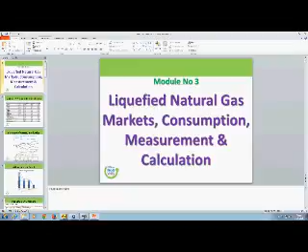All right, folks, let's start this part about the LNG calculation. Very briefly, this is a short one. Can you all see it? We have touched on this thing on our first day.

So it is the market consumption measurement and calculation. This is what we are going to do. You remember I've shown you on the first day where we have got methane. Every different LNG is like every finger of us has got a different fingerprint. Whatever we produce at one time in one refinery or one liquefaction plant, it will be different to the other.

So normally, as a general rule, Ras Laffan has got 90% methane, 6% ethane, propane, butane, and this is Das Island, and this is the standard. So normally the density of it is about 0.46, and the carriage temperature could be different because we call them impurities. We prefer to have pure methane molecules in it, mole fraction, but unfortunately the cost of removing these things is very, very high.

So sometimes these impurities are there. We are going to consume it, so we do not want it to be, but this is what is affecting your engine combustion. For example, if you have got a high number of moles of propane and ethane, your piston is going up. Their ignition point is different, so they will ignite and they will not let the piston go up properly and get the real combustion at the right timing. That will create knocking in your engine.

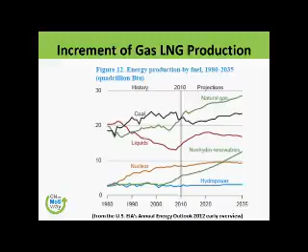Increment of gas LNG production, just to give you a touch - coal is fairly steady. Natural gas, can you see how many millions of tons have increased from 1980 to 2035? At the moment we are somewhere here with regard to hydrocarbon, but it is going to be natural gas here, and sometime later we are going to go very high. There is a saying that nuclear might be a very good alternative, but in the current political or security situation, that can't happen.

So this is the LNG environment benefit versus traditional engines. We have got these figures for emissions across the engines - low sulfur fuel gives this kind, and heavy fuel oil this kind. So we want to reduce the NOx, we want to reduce the carbons, and we want to reduce the SOx and particulate matter. The good thing is in LNG fuel these things are very less. Can you see? Most of it is just NOx and a little bit of carbon dioxide - no particulate matter, no SOx.

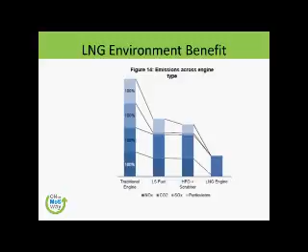So there are three main markets again. Henry Hub, a distribution for natural gas pipelines in Louisiana, owned by Sabine Pipe Line LLC. Why are we giving you this information? So that it is food for thought. When you go back, go to the websites of these. You can note down their names and go to their websites and see what's going on.

Because understanding LNG - we are talking about LNG calculation - and why we are doing this calculation is for buying and selling, isn't it? Bunkering is all about buying and selling. Touch wood, there is very little monkey business in LNG bunkering as compared to others. The pricing point of a natural gas futures contract traded in New York Mercantile Exchange, we normally refer to as NYMEX - if you Google NYMEX you will find this. And the OTC swaps traded on Intercontinental Exchange, called ICE. So normally we refer to it as ICE, NYMEX, and of course Henry Hub as HH. Henry Hub is a USA one.

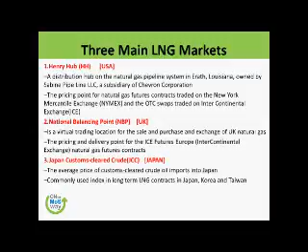We are selling and buying it not in liters or tons. We buy and sell it because of its calorific value. We call it MMBTU, British Thermal Units, and LNG is traded on its energy content. The more impurities, the lesser the MMBTU, millions of British Thermal Units.

1 cubic meter of natural gas is equal to roughly 0.0392 MMBTU. Again, it varies with the quality of LNG. 1 cubic meter of LNG is 23.9 MMBTU roughly.

So you can see, 1 cubic meter of natural gas, NG, which is coming into our pipelines at home - but when you convert it to LNG, it is rather than 0.0392, it is 23.9. Because what we have done, we have condensed it to 600 times of its volume. So technically, 1 cubic meter of LNG is equivalent to roughly 600 cubic meters of natural gas.

1 MMBTU could heat, just for your knowledge, 2519 liters of water from 0 to 100 degrees centigrade. And 1 cubic meter of LNG, which is 23.9 million BTU, could heat 23.9 times 2519, which is 60,204 liters of water from 0 to 100 degrees. So over 60 tons of water you can heat with 1 cubic meter of LNG.

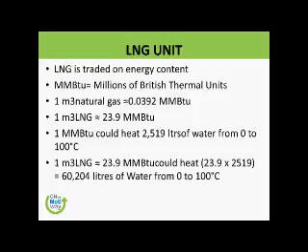And of course, it is all specific heat, we are not talking about any latent heat. Are we happy? This is just to give you the understanding of the unit. Unless you understand the unit, you cannot calculate it, buy it, sell it, or use it in your engine room, or on board your vessel, or supply it as a bunker to another vessel.

So a BTU, I'm just explaining - those of you who are naval architect engineers, you already know what BTU is. The amount of heat needed to raise 1 pound of water by just 1 degree Fahrenheit, which is equal roughly to 1055 joules, or 252 calories. I suggest you please note it down, because this conversion is important, can you note it down please?

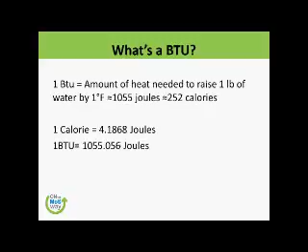This is courtesy of the Energy Information Administration. That is the source for this information.

We are now talking about the fuel efficiency in kilowatt hours per pound. Wood has this, coal has this kilowatt per hour for heating efficiency. Propane has this much, oil has this much. So natural gas is slightly higher than oil, both in heating efficiency and kilowatt per hour per pound. So that's why we are very happy that this thing is cheap enough.

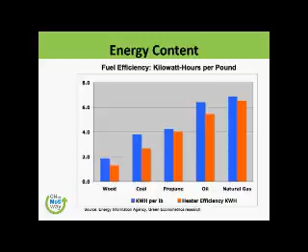It is available in abundance. There is a rough estimation - of course, don't quote me - it is going to be available for a couple of hundred years. But of course, the world, or the experts, are trying to find other alternatives now. Okay, so LNG content, can you note down this also? This is giving a comparative analysis.

As an engineer or naval architect, you also want to compare these fuels. For example, LNG has 53.6 megajoules per kilogram, MDO has 45.5, and HFO has 42.9. So LNG has more energy here, remembering we have reduced it to 600 times its volume.

600 cubic meters, equal to the size of this building, can be shrunk down to just 1 cubic meter which we can carry in our suitcases, isn't it? That is the amount. Now we are doing the comparative analysis of fuel oil flash points.

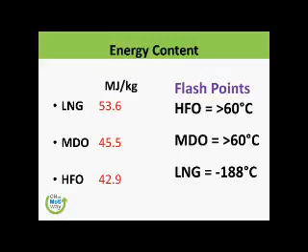So this is the volumetric comparison. HFO is 1.8 times the volume of LNG, and MDO is 1.7 times the volume of LNG. So this is the volumetric comparison for our bunker bars, bunker tanks on board the ship.

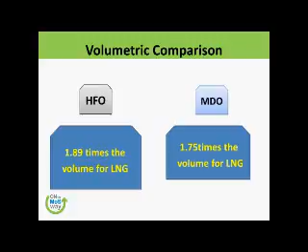Various LNGs have different identities, which I have already discussed with you. And of course, methane number - that is one important thing for you as an engineer. It provides an indication of knock tendency. Pure methane is going to be 100 methane number. So if you are taking a bunker, or giving a bunker to someone, they will be more interested in the methane number - how many moles of methane are there, or how much is the impurity, isn't it?

So pure ethane has 44 moles and 44 methane number, and pure propane similarly. If we contaminate this one, this number will not be there. So the number varies depending on the composition of LNG. The methane number is the final number, putting it all together. There may be some butane molecules as well.

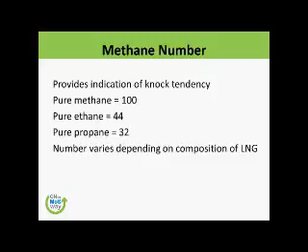So knocking - this is what you as an engineer will be more interested in. That is why I want you to please feel free to ask me questions. It affects low pressure 4-stroke engines normally, causing not smooth combustion in the cylinder chamber. Spontaneous combustion ahead of the flame front - I've already explained normal combustion, with the spark. But slightly ahead of the build up of maximum pressure, there will be a knock - this is a very slight knock, and this is an intense knock. If the knocking is more, the vibration and stresses on the engines, and the exhaust temperature management will be difficult, and all these kinds of things.

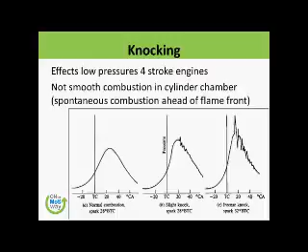So, methane number: if a gas mixture has a methane number of 80, its knock resistance is equivalent to that of a gas comprised of 80% methane and 20% hydrogen. It is as simple as that. There are gas constituents which have a higher methane number than 100. Therefore it is also possible for a gas composite to have a higher methane number than 100. Mind that it is not percentage - it is the moles or the molecules or number.

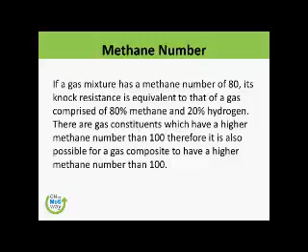Now, LNG behavior - this is very important, especially for purging the tanks or managing bunkers, etc. LNG, can you see, at minus 100 degrees: if the room temperature here is minus 100 degrees, I will find the LNG suspended in the middle, anywhere. If I release the LNG here, it will stay here. It will be suspended because it is the same density as the air, neither heavier nor lighter. And if it is going to be, say, minus 90, it is going to go up - so it is lighter than air. You remember what is NAIL?

Nitrogen, air, inert, and LPGs - that is NAIL. And methane is sometimes on top or at the bottom. If it is in this state, it is on top. If it is in this state, it is at the bottom. So above minus 100 degrees, it is lighter than air; below minus 100 degrees, it is heavier. So the ratio is the density of methane vapor divided by the density of air. Note it down - density of air is assumed to be 1.27 kilograms per cubic meter.

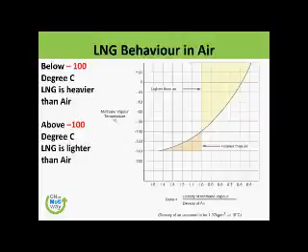Okay, so let's move on. We are talking about LNG behavior and density shift. We have already talked earlier about the boil-off and all that kind of thing.

Module 2, prepared by the World Maritime University, has addressed these things very well, and I will ask you to have access to those things if they allow.

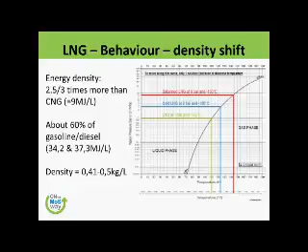So LNG value for combustion - this is also one of the parameters in bunkering. What is the value? If I'm taking a fuel oil bunker and all that, you send it to the lab for checking the quality. Do you get the same quality bunker at every port? No. Some of them have a higher sulfur content, some less sulfur content.

But mind that the more impurities you remove, the more expensive it is going to become, isn't it? So LNG quality is dependent on several aspects. There needs to be a balance in order to ensure LNG bunker is value for money and proper operation of the engine. It is a very fine balance.

You do not want to - if you have a pet, you don't want to feed him or her cold biscuits, because it will not be worth it. So you will have to decide what is better for you. LNG will be traded in energy content, BTU. Change in composition will affect things - if you change the temperature, the density, energy content, methane number, and above all, the price.

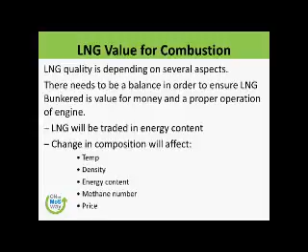They will be supplied to your bunker barge or to you as a ship with all these variables: temperature, density, methane number, and the price is normally determined by brokers, linked to crude oil price. At the moment it is fairly linked to crude oil price, let me be honest. But what they are trying now to do is make it more independent of the bunker price.

As soon as the real bunker market for LNG is established, which is happening because it is supply and demand - LNG would have shot up very fast earlier because this was considered the fuel of the future by many. But suddenly oil prices have gone down, so the difference between the price of LNG and marine diesel oil has become so small. So ship owners don't want to lose their space for new bunker tanks or LNG tanks, and they also don't want to convert their engines for dual fuel, because existing engines can be converted but it all costs money.

Or some may decide, okay, we'll put a totally new dual fuel engine. In fact, whatever we call dual fuel engines are mostly tri-fuel engines - they can burn heavy fuel oil, diesel oil, marine diesel oil, and of course LNG. So, did I answer your question? Yes sir.

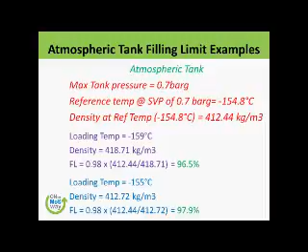Okay, so that was an atmospheric tank filling. But now we talk about the pressure tank filling limits, which is maximum tank pressures.

For example, 10 bar gauge. Your bunker tank, which I showed you in the movie this morning, has a reference temperature which is SVP of 10 bar gauge and minus 121.9 degrees centigrade. So the pressurized tank, did you notice we cannot make it full? We can make it 83.2% because we need some room for it.

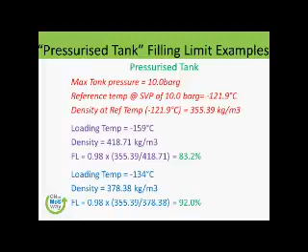And of course 98% filling - that is the constant. 98 is the reference point. So this is the comparison.

You go through this yourself, so that you can make a comparison yourself. And read the note at the bottom.

Pressure tank loads are 13.9% less than equivalent size atmospheric tank, because earlier on we were always thinking bunker tanks, pressurized tank, bullet tank type. But now the industry is saying, because it has a lot of broken space, wasted space, why not convert certain areas and give it the shape of - now membrane tanks are more common on these vessels as the bunker tanks. So read it.

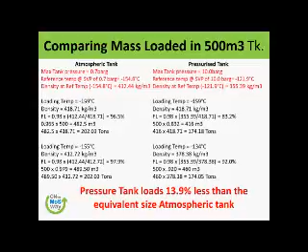Okay? Happy? So this is the formula. Can you please note it down and also note down this thing. Loading limit is the maximum allowable liquid volume relative to tank volume to which the tank may be loaded. It is very important for you.

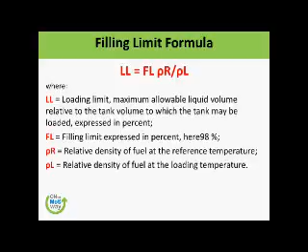So here we go. This is a couple of things which I just want to show you, which you will come across on board your vessel - the Coriolis sensors, which create vibration, and we measure the flow offline. So sometimes rather than just measuring the liquid volume, we are also measuring the flow, how the flow is going.

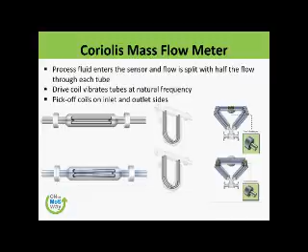And of course, density measurement is based on the natural frequency. So if there is no flow, there will be no change in frequency. If there is flow, then there will be a change in the frequency.

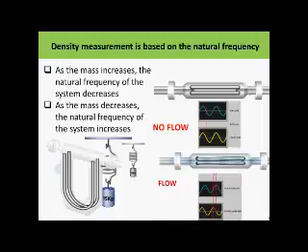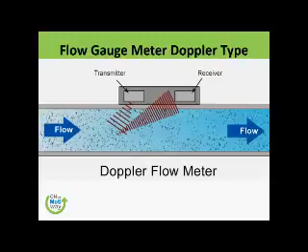So flow gauges are different, and some of them are Doppler meter type, which uses transmitters and receivers. And then we have flow gauges which are also turbine type, where the rotor is moving, and the motion of the rotor gives you the flow gauge or flow turbine flow position. This is what you also learned on the loadicator exercises when we have done them.

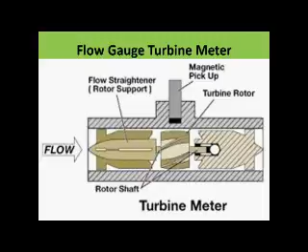You have seen that, and in some of it you will also do it in module 4 when we are talking about the stability of the vessel.

So that is it. The calculated density of the LNG loaded is measured in kilogram per cubic meter. And of course, this calculation is based on the composition of LNG loaded in mole percent at a fixed temperature, say -161, taking into account the molar mass of each component as defined in the standard, which is ISO 6976.

Happy? So, of course, the molar volume of each component, the correction factors K1, K2, as described in the revised Klosek-McKinley calculation method. Folks, I've given you this just as food for thought.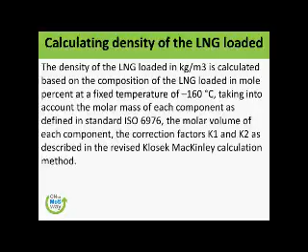The scope of this module is not to go in and describe each method for calculations, but you can find the information in different books and on the internet as well.

So the calculation of gross unloaded or reloaded energy is ELNG, in terms of VLNG, volume of LNG unloaded or reloaded by the barge, and ρLNG, density of LNG unloaded or reloaded. HLNG is the gross heating value on a mass basis of the LNG reloaded.

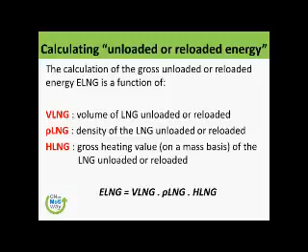So that is the E value of the LNG. VLNG into ρLNG and HLNG. So that is the formula.